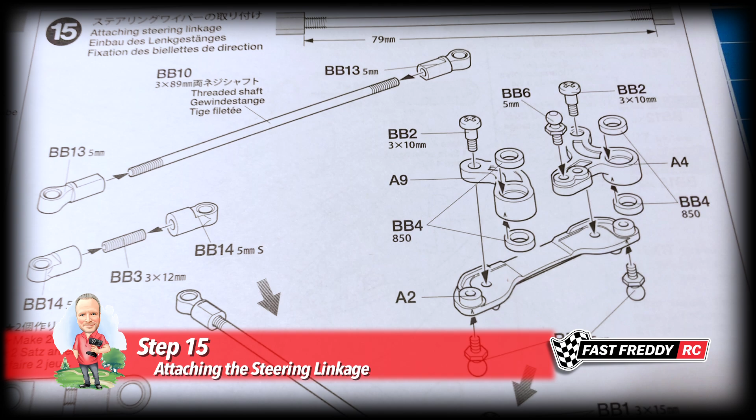So for step 15, attaching the steering linkage, there's actually quite a few things we have to do in this step. We've got to build the steering setup here.

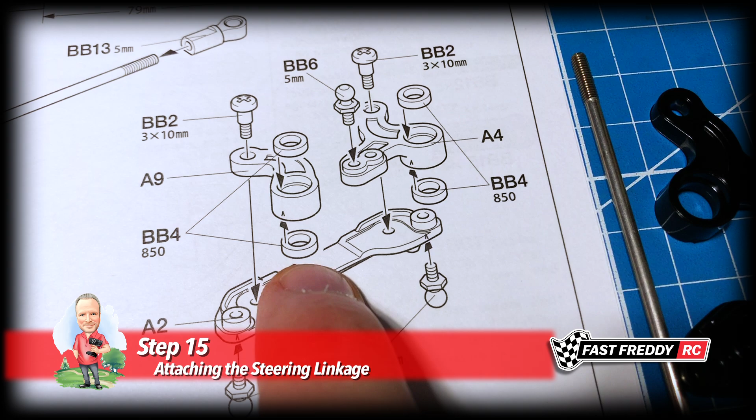There's a number of step screws and ball connectors. And these BB4s are actually the plastic bushings, but we're going to be replacing those with full ball bearings, so the steering's going to be pretty smooth once it's installed.

You can see we've got some grease that we need to put on the other side of these A10 parts. And then, obviously, we have to put on these end bits for the threaded shaft.

They're all for the ball connectors connecting the whole steering linkage. So look at all of the screws and pieces that we need for this. You can see the ball bearings we're going to be using, and the parts that we need for this step as well. I'll set this up and we'll put it together.

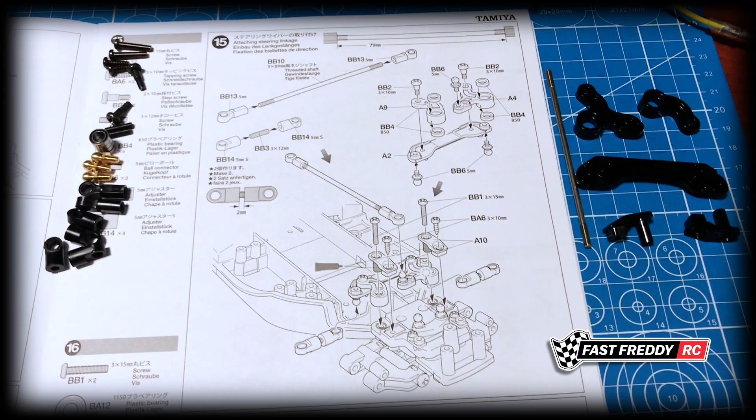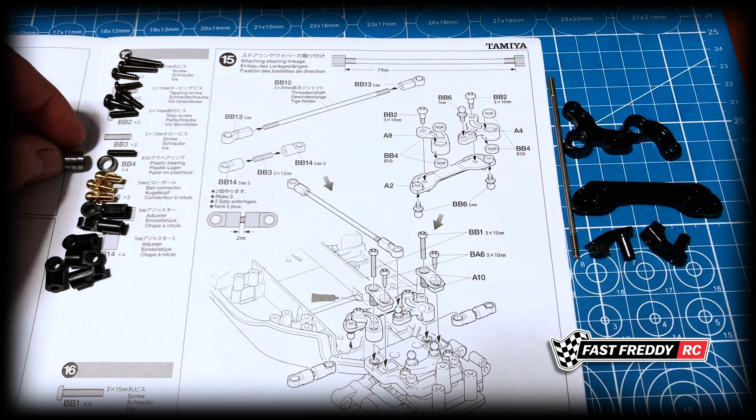So let's put the connectors on first. You can see we've got two of these little guys using these BB14 pieces, and we're going to need to screw those in on either side. I'll grab the other one and we'll see if we can't get these in.

Try and level that out a bit, make sure that's going in relatively straight, but they're not quite. It's going to take a little bit to do. Okay, well there's one, but now this one needs to be adjusted so that it's going in fairly level. So let's see how this works. Yes, they're going in now.

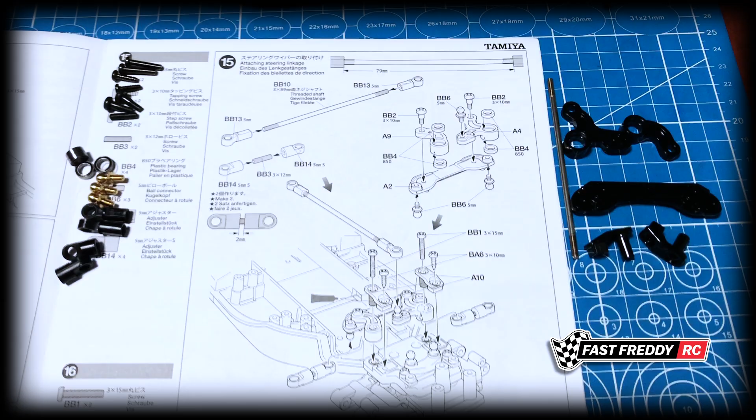So we're going to need to turn this and get it so that it is 2 millimeters. They're pretty short, so we need that gap to be at 2 millimeters. Now that's almost correct, so let's see how this looks on here. We need this to be 2 millimeters. I'm going to have to turn this one more, I think.

Try that. Now the diagram in the instructions actually works quite well, and it looks like we're pretty much at the 2 millimeters anyway, if you can see that. If I put that to the edge approximately, maybe I'll do one more turn here. There we go. Looks about right.

Yep, that's about the 2 millimeters. So there's one of them done. We're going to have to double up and make another one. Again, you just got to make sure that these are going on level, and I try to get them started a bit before I spin them on.

It's looking okay, so let's... yeah, I think so. Let's keep going here and see what we get. Yep, they look fine, so we'll keep spinning them on. This is where you need a bit of thumb strength because they're quite tight. One more turn—looks like that's about right.

So we'll measure it. Pretty much at that 2 millimeters. Let's make sure that they're more or less the same, which it looks like they pretty much are. So that's good—those two are finished.

So now we have the bigger one to do, and those ones are going to be using these BB13 connectors or adjusters, however you want to call it. But for me now, it's going to be easier to use my handy dandy shock pliers to hold that while I turn this on.

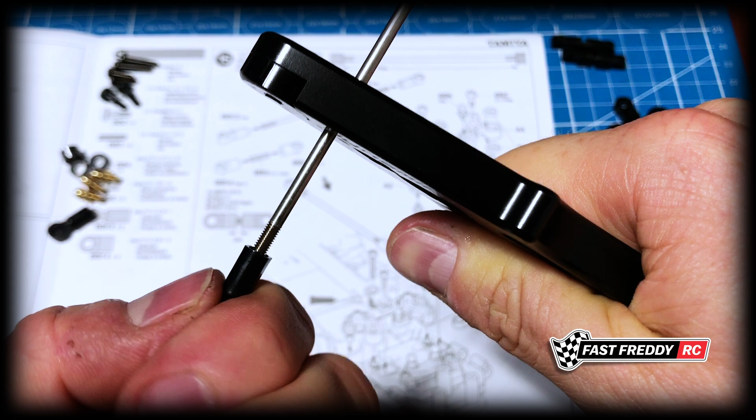Gives me something nice and firm to grab as I turn it, and that seems to be correct. Okay, so let's do the same thing with the other side. Again, I'm going to hold it using this, and let's turn that on. There we go.

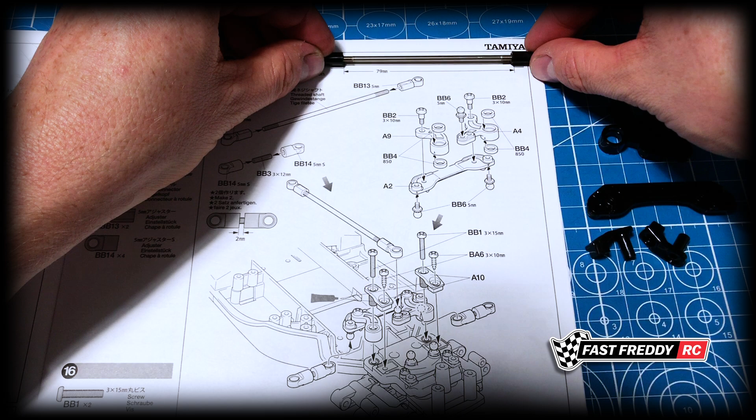Now I want to make it fairly even so that both sides have the same amount of threading showing. I just want to check to see how that's going to look, and it actually looks like I don't need to go much farther. In fact, I think I'm going to have to back one side off a bit. So if I look at that, I think we're going to back off this side.

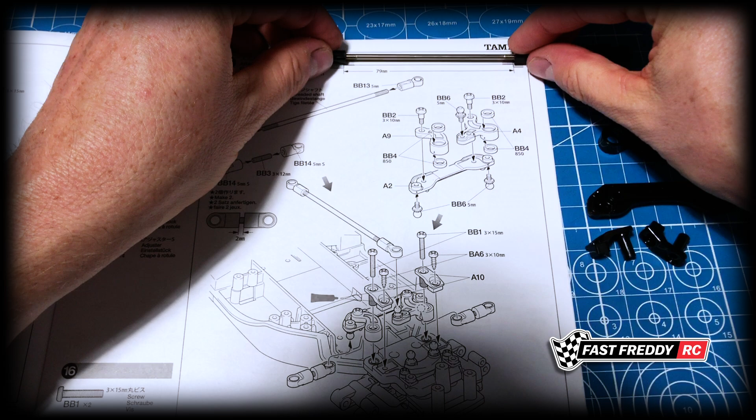And see if we can get this correct. So it needs to be at 79 millimeters. Now if I look on a ruler, the 79 millimeters is almost 80.

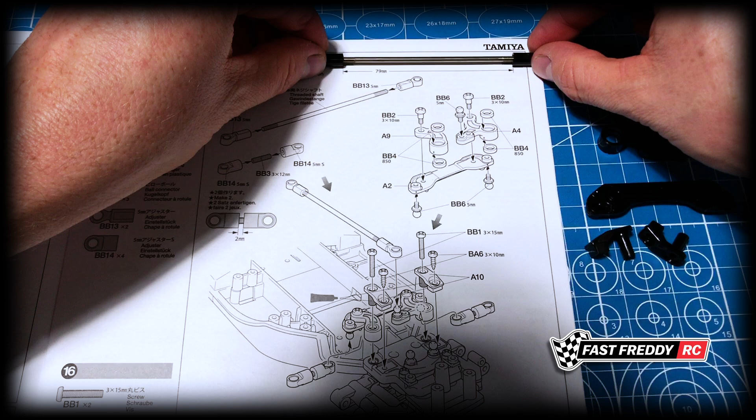Which you can see is pretty close. If you can see that whole thing, 79 millimeters. I think we're almost there. Now I'll twist it off just a little bit more. But I think we're good to go. So there's the 79 millimeters. Yep, I think so.

I think we've got it. So there is our steering arm complete. So those pieces I can kind of put aside. We're done with that for now. So let's take a look at the actual steering setup.

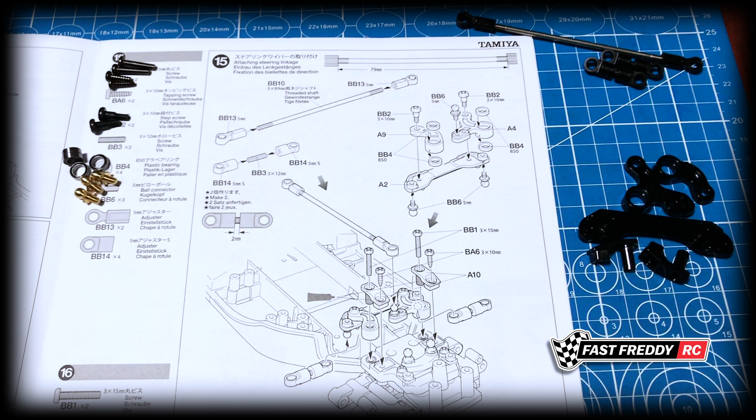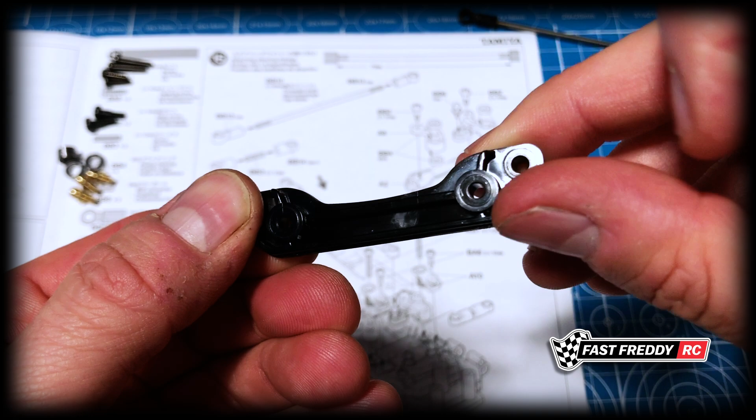Let's go with this. We know that these ball connectors need to go on the ends just like that. So I will grab the handy dandy box wrench. And again, I'm just going to check that again. It's got to go in the end ones. So let's make sure we've got this going. It looks like it's relatively level. So we'll screw this all the way in.

So there's one of them. So we're going to do the same thing on the other side. So again, we're going to use the box wrench. And I'm going to turn that into there, using the box wrench to kind of help level it out. Looks like I've got it correct. So we'll screw it all the way in.

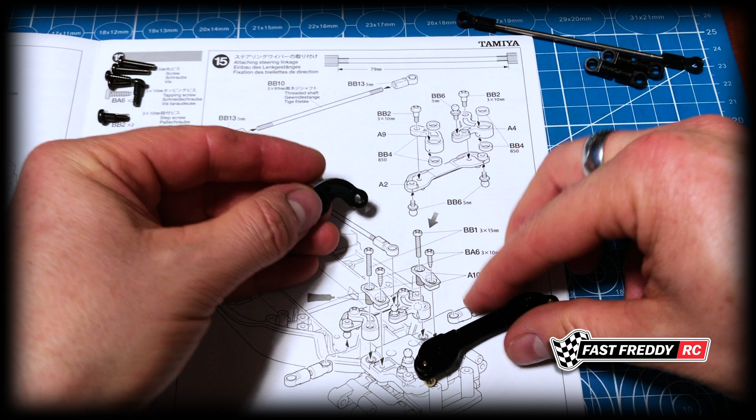And there we go. So that's what that part looks like now. And you can see that we've got to put these pieces on. Now you can see that for the A9, it kind of looks like that. And this one's a little bit more, well, there's more to it than the little guy.

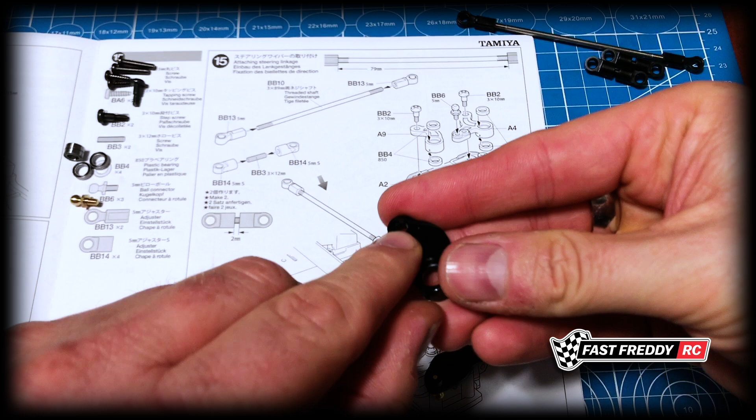So if you see this, we know that we need to get the BB2 into this top corner. So I'm going to start it off here, I think, where it's going to, oh, I see. It's going to go directly into that part right there. Okay, so let's do it this way.

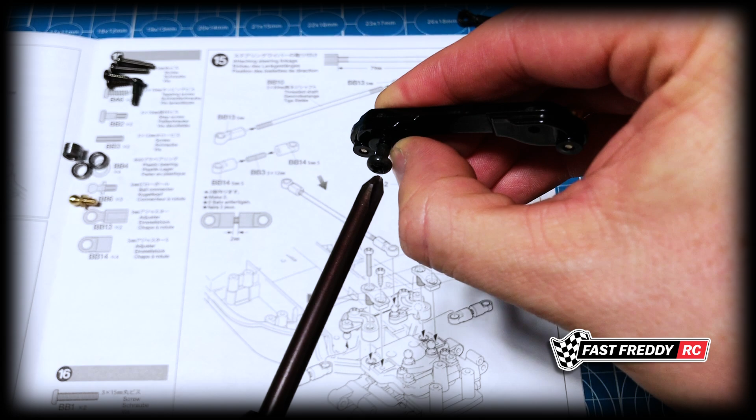Before I put those bearings in, I'm going to screw this onto this spot right here, just because I think it'll be easier to do if we do it this way. So let's just make sure that's going in correctly. Yes.

So, whoops, let's knock that off. Try this again.

And again, this is because this is a step screw and it's not threaded. Make sure that you get to the end but don't over tighten it. So it should end up looking just like that. Now, I think that's going to go in just a little bit farther. Yeah. That means there's just enough play. But again, don't over tighten. So you can see that there's a bit of play, but not too much.

And you can see that if we take a bearing, there's one on the top and one on the bottom. One would pop in there. And if we turn it over, another would pop in there. So that would be one side, and the ball bearings on either side of that.

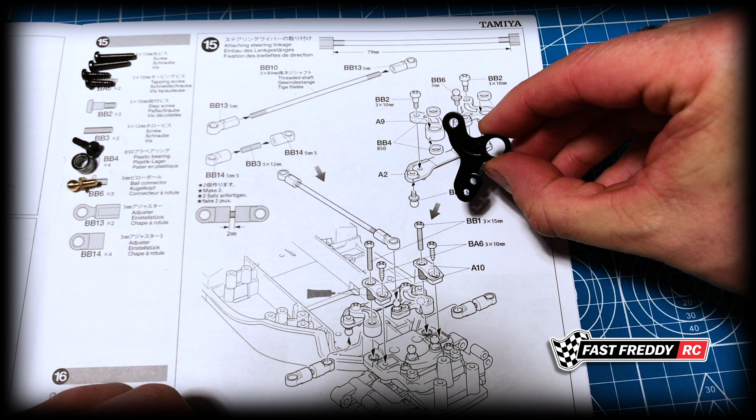So now let's work on the other side. So you can see that the way this is flat, this is raised. We want it in the raised side, so the ball connector needs to go in the end right there. So we're going to grab that, and we're going to turn this in. Make sure you're trying to get it as level as possible. I pretty much have it, so we're going to turn this on.

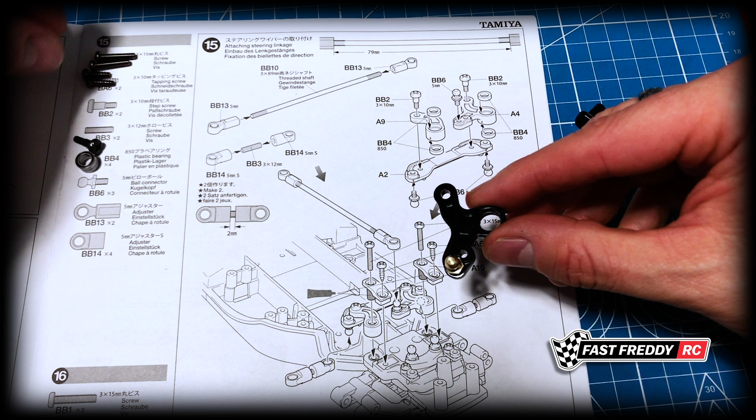Get it all the way down to the end. There we go, don't over tighten. Now you can see the way that's shaped, we've got our step screw again that's going to go through that arm and go directly into this hole right here, so that's going to sit down here.

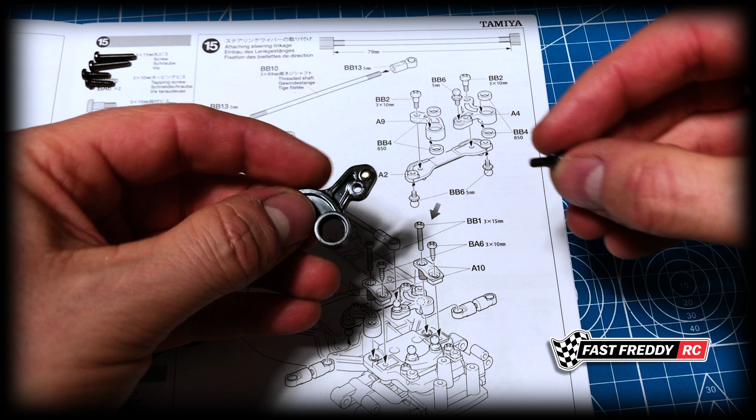Let's make sure the positioning is right. Just out of curiosity, I'm curious to know how much of that's going to go down. Yeah, it's going to go a fair bit. So again, let's put that in, and I think it's probably going to be easier to let it sit on the table initially.

Yep, and now I'm going to hold it this way, and we'll screw it all the way in. Again, once you get to the end you'll know, but don't over tighten it. It's pretty close.

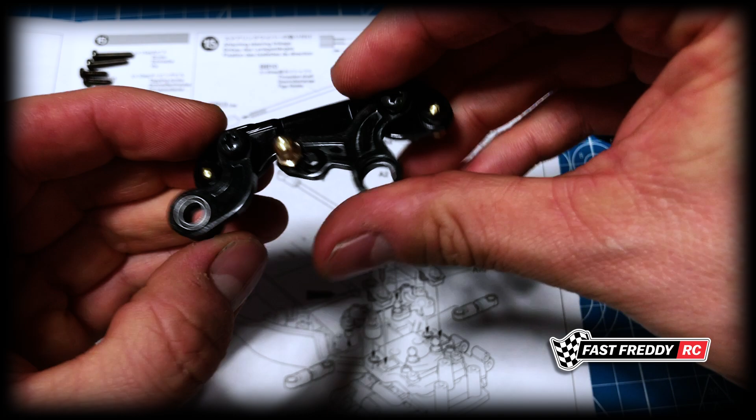I'll do one last check on this side. Yeah, they're in. So ultimately, that's what it looks like. We've got the other bearings to put in. We'll snap one in there, turn it over, and put one in there. So ultimately, that is how that looks. Kind of a cool design.

So now let's grab the chassis. You can see that the way this is going, these bits are going to end up holding everything in place, but it seems to be showing that they want you to pop these onto the ball connectors right away. So let's do that. Let's see if I can push this on, or whether I'm going to need to use pliers to do it.

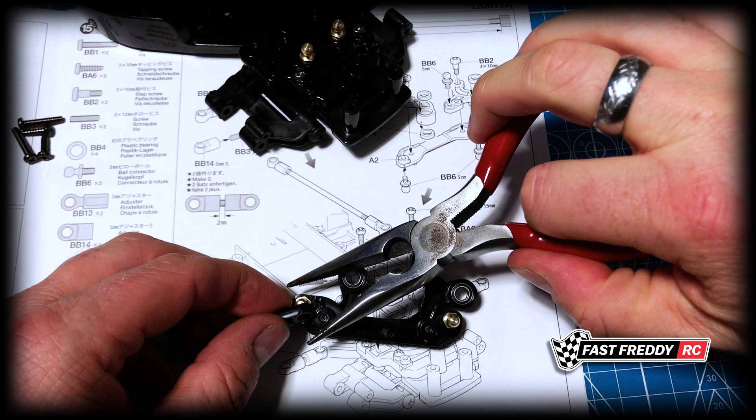No, I'm going to need to use pliers. So let's put that there. Let's see what we can do here. There's one. And do the same thing with the other side. There we go. So there are those arm bits in place.

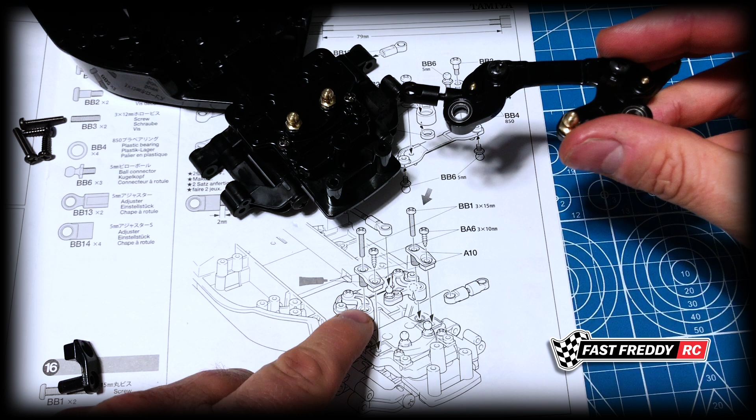So now, if we take this, you can see that these bits are going to go through those ball bearing bits just like that when we're attaching this. Now, you'll notice it's showing you greasing them up, but because I'm using the ball bearings, I'm not going to do that. So we're going to take this and make sure that this fits right on that hole there.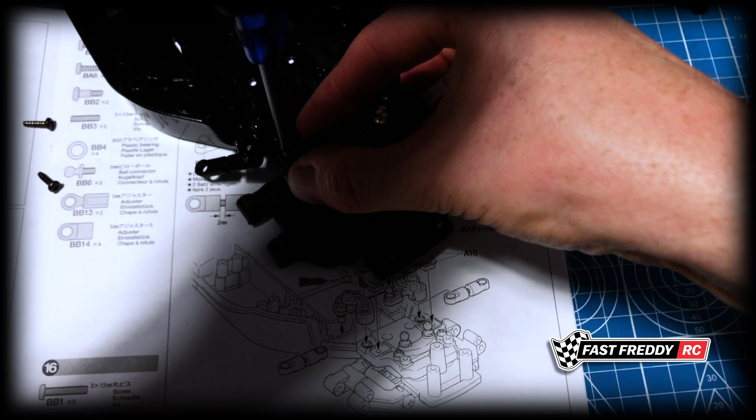This is going to fit down below, and then we'll end up getting it screwed onto here. First off, just want to make sure that that is correct. Yes. So we're going to use the non-tapping screw, the long BB1, and we'll start this off. I just want to have something in place. And then we have a tapping screw, the BA6, which is actually attaching to the front.

Now, I'm not attaching the whole thing down yet. I just want to make sure that this is actually sitting properly. So let's do the same thing with the other side. We know that it's going to be this piece right here, which uses the large tube section to go through and down, and we use one of these BB1 screws to screw it in place.

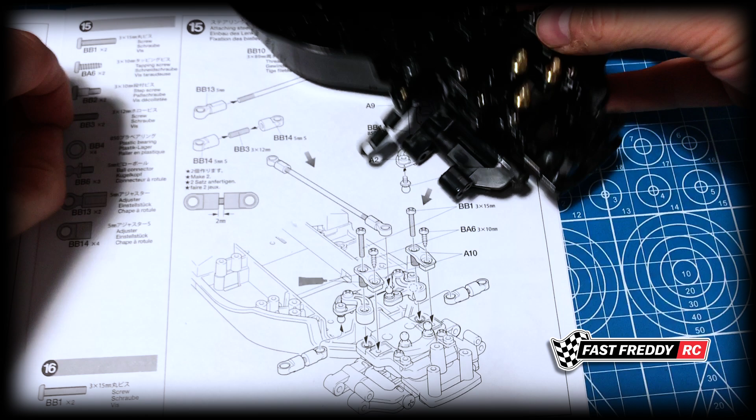And these are the non-tapping screws. Then we're going to use a BA6 on the front and screw that all the way in. Again, we'll screw that down. Just get it going first, and then I can do a test. So to my mind, this is pretty smooth here.

So we can screw everything in now. I'll screw this in all the way. So we've got the tapping screw on the front, which is in. This we want to go till the end, but don't over tighten because you could strip it out. Feels pretty good.

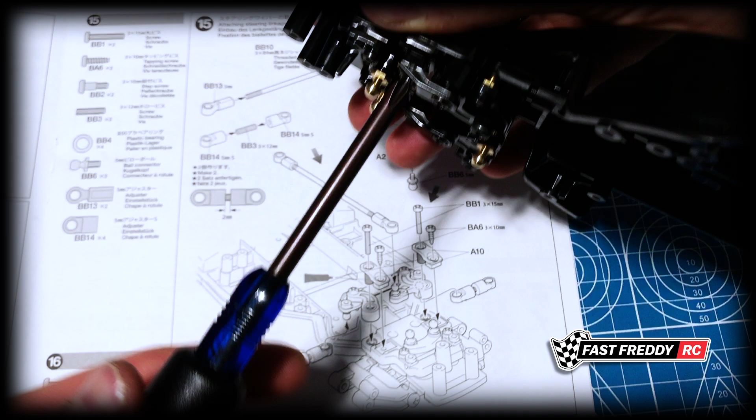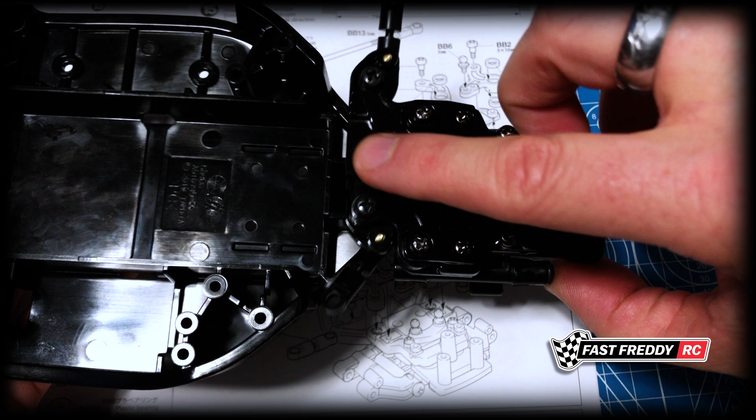So I'll turn this around, same idea. I'm going to need to screw this one in all the way, and then the tapping screw at the front. So there we go. So there is our steering assembly in place, and this feels really, really smooth. The bearings help a great deal. Yeah, that feels very smooth.

So next thing we need to do is snap on our steering arm, which is going to go here. So we'll take this, I'll grab the pliers. In fact, I'll do it the same way. And take that. And there we go. So there is our steering arm to the servo.

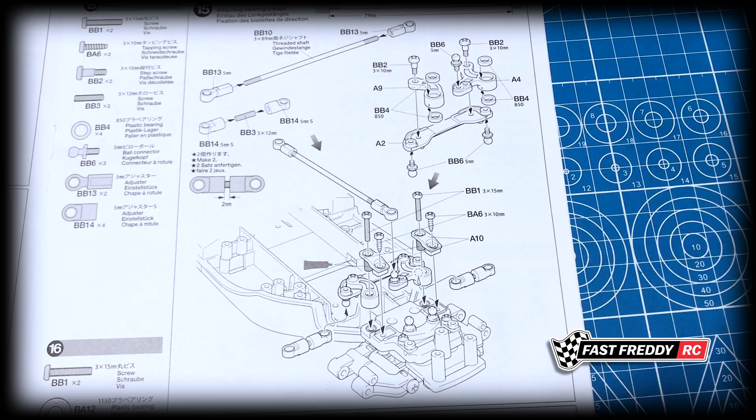Very cool. So that means step 15 is complete. So now we're going to move on to step 16 and work on the front axle.